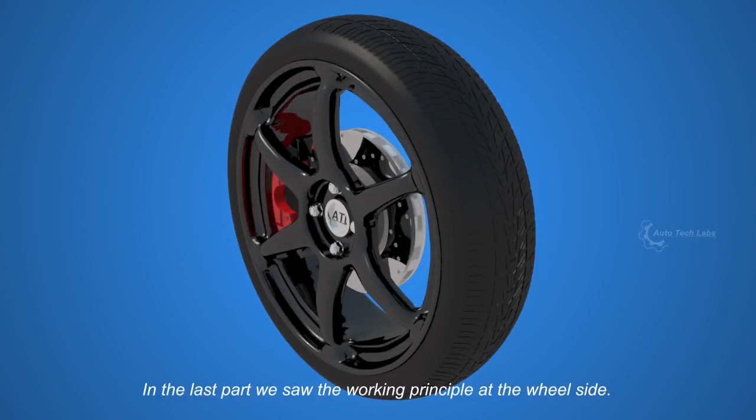In the last part, we saw the working principle at the wheel side. In this part, we will see how it works at the pedal side.

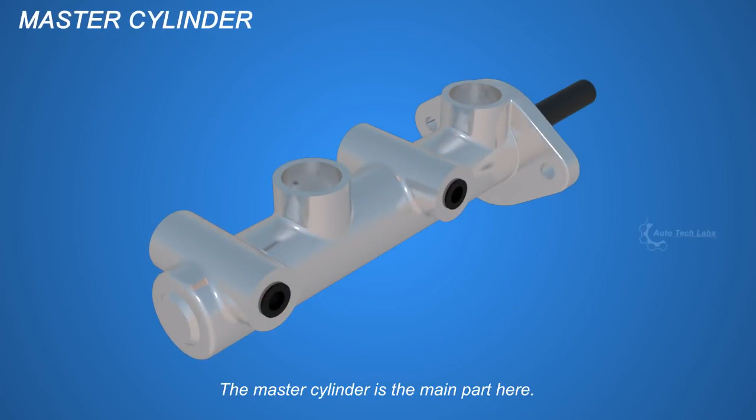The master cylinder is the main part here. It transfers the force on the pedal to the calipers. There is a push rod, outlet port, and a fluid reservoir tank.

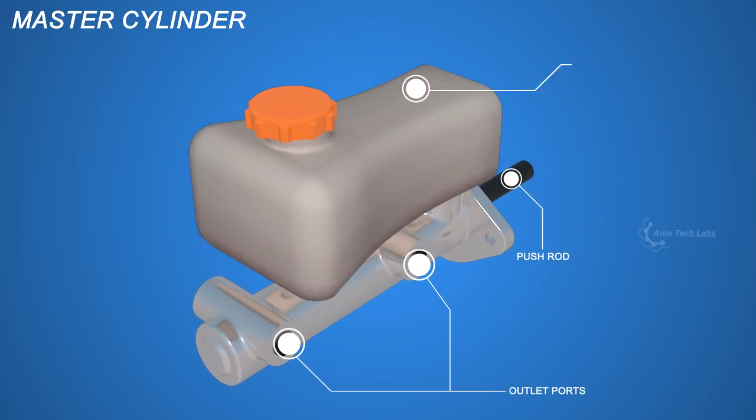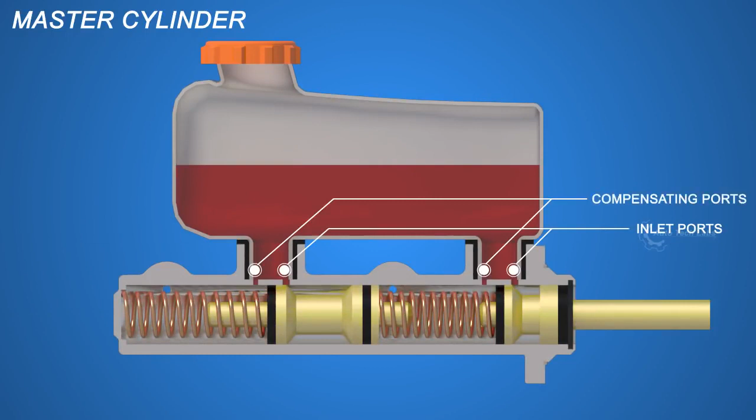Let's see what's inside the master cylinder. There are inlet ports for the fluid to reach the cylinder, compensating ports, primary piston, secondary piston, retaining springs, and piston seals. Now, let's see how the master cylinder works.

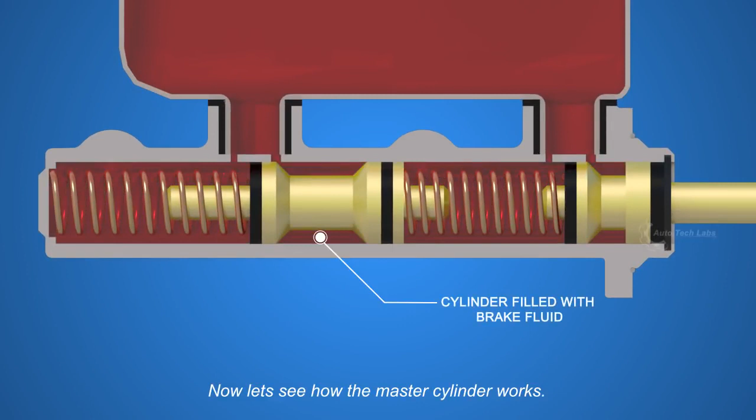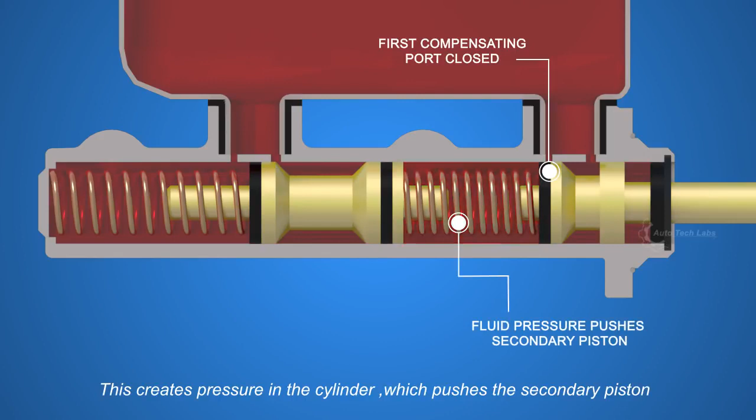When you press the brake, the push rod pushes the primary piston, closing the first compensating port. This creates pressure in the cylinder, which pushes the secondary piston, further closing the second compensating port. Hence both pistons will push the fluid to their corresponding calipers.

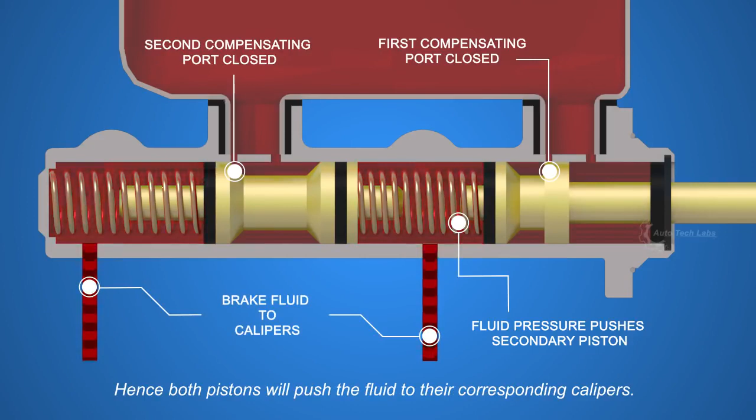In case the secondary piston fails to build up pressure, the primary piston can still develop pressure, with increased travel.

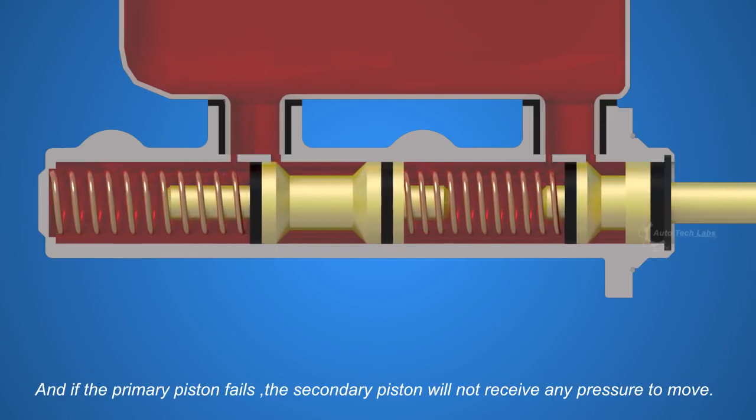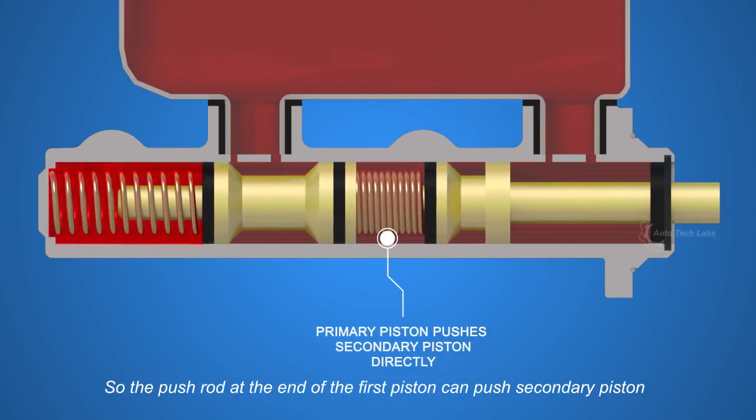And if the primary piston fails, the secondary piston will not receive any pressure to move. So the push rod at the end of the first piston can push the secondary piston, which requires much more force to be applied on the brake pedal.

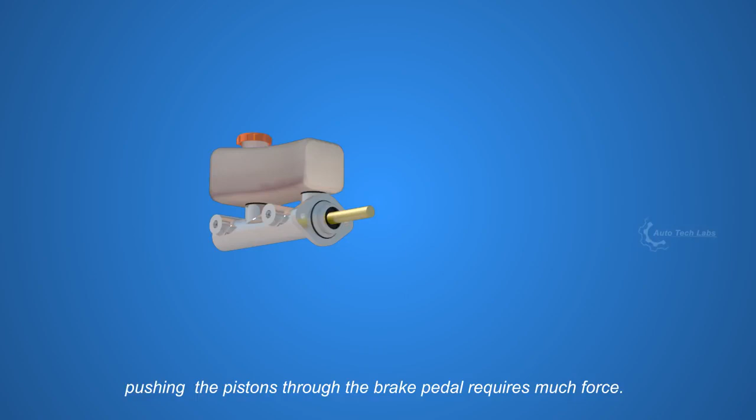Even for a fully functional master cylinder, pushing the pistons through the brake pedal requires much force. So later on, another component named booster was introduced. The brake booster comes between the pedal and the master cylinder, and utilizes the vacuum from the engine, assisting the brake pedal and making it easier to apply brakes.

Let's take a look inside the servo. It consists of a valve rod, dust boot, air filter, valve spring, diaphragm spring, vacuum check valve, and hydraulic push rod.

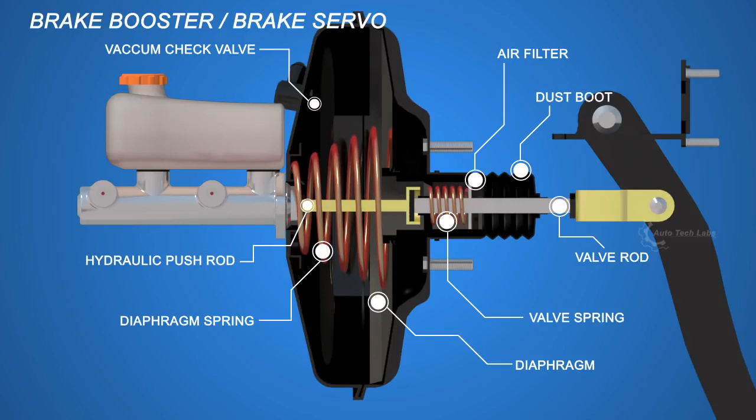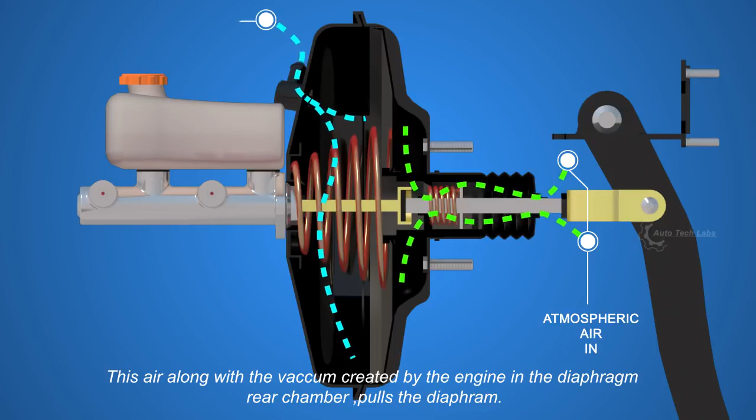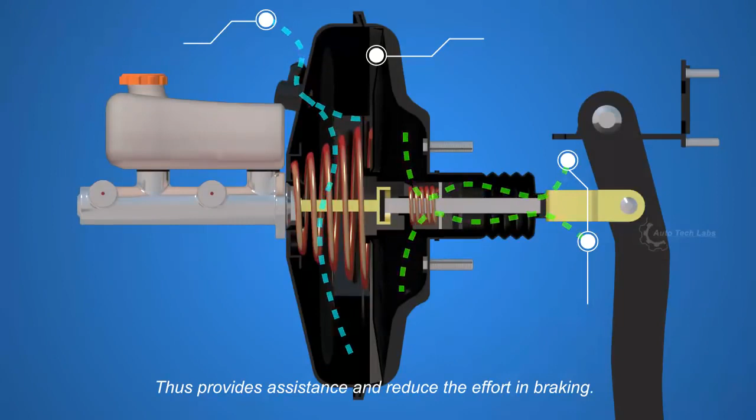When you push the pedal, the valve rod opens the inlet valve, allowing air into the diaphragm front chamber through the filter. This air, along with the vacuum created by the engine in the diaphragm rear chamber, pulls the diaphragm, further pushing the push rod towards the master cylinder. Thus it provides assistance and reduces the effort in braking.

And that's how an automotive braking system works.